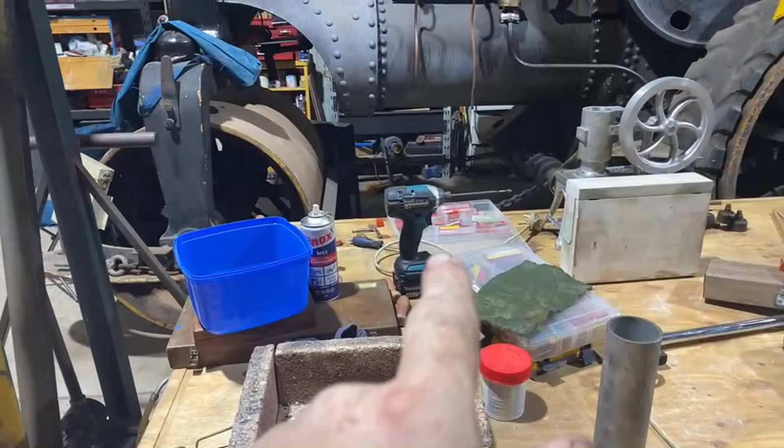Bust my glasses today, not real happy about that, I'm going to have to get some. Hey Dan, that's something that happened today. Found my number 29 drill, which was actually in the battery drill when I went looking. Also found my screwdriver bit, which is in Ken's driver gun that he left here, but that was just then. Christian was here today, Christian's Sparky, he's a member of the club, generally all-round helpful person.

We've got a new switchboard here, and the end, hopefully, of all our electricity problems. That's fixed, and we've got a proper fancy meter in the board, and switches and stuff, so it's a good job.

Anyway, that was something that happened today, and I sort of held ladders and helped pull wires through and didn't do an awful lot more, as I've got vertigo and I'm not real good actually, and I hope it's gone by tomorrow, because right now I feel like I'm going to throw up, but anyway, we'll try not to.

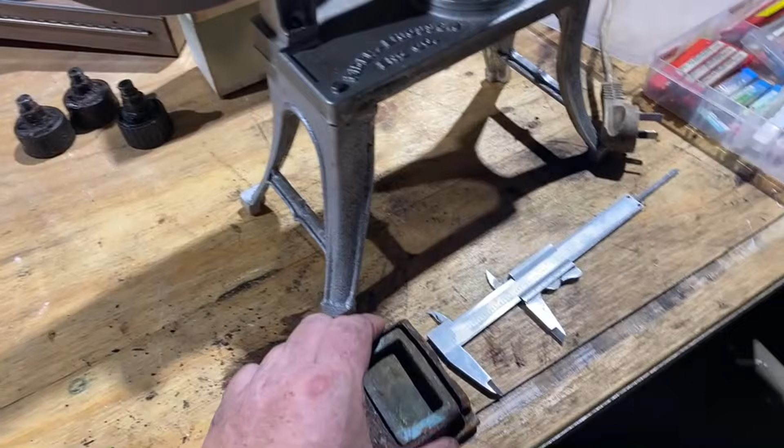Got some photos, I guess everyone who's on Discord or so forth or wherever has probably seen them. Phil sent some photos of the Beyer Peacock engine, now it's been sandblasted. Bit of a mess, to be honest, but it's probably fixable, you can see what's really wrong with it now. It's going to need a new sleeve in it and some ports and things.

If anyone's in Manchester with nothing to do for a couple of days, I'll send you a list of drawings from the Manchester archives and you can look them up. So I've not had much luck.

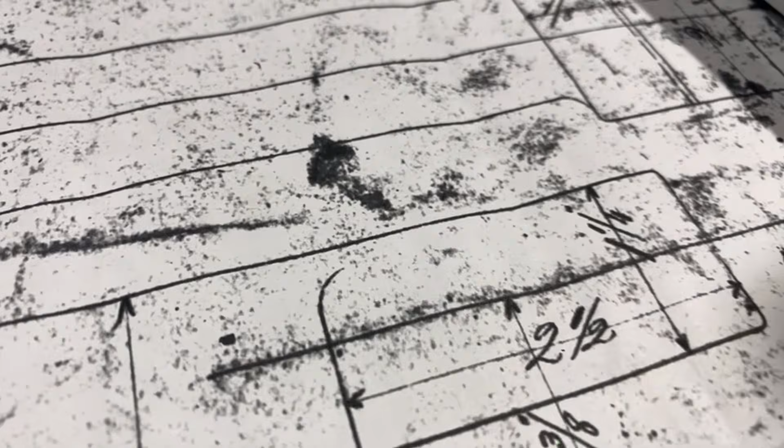I've got these, I haven't got the bits back yet to have a look at, even really have a good look at it apart, because Phil took them for sandblasting. And move that along there, and this, all this other stuff. Phil took them for sandblasting and I haven't caught up with him yet, and the way fuel prices are at the moment, I don't know when that's going to be.

So I've got a couple of drawings, that's about it, that's what reminded me. I've got this drawing of this part.

Which is this bit. Actually 1-to-1, except for the wear, etc.

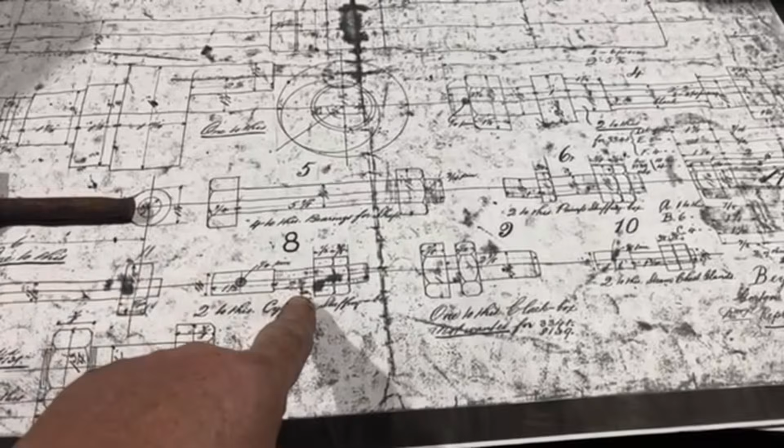So I've got that drawing. Now I've got all the studs. Some of the stuffing box studs have got a pin in them, apparently. They're going to be fun to get off. Steam chest glands, the same, with a pin across them, to hold them in place, pushed in with the pin. I'm guessing that's how you get the studs out and get the gland off, or back far enough to pack them.

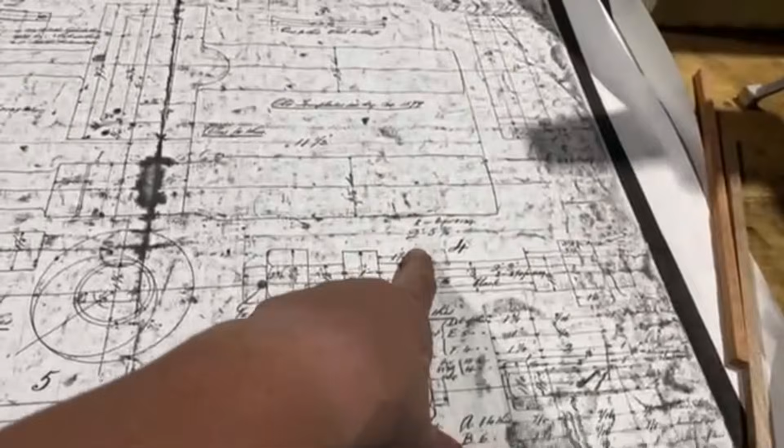The 2 long bolts, which are 2 foot 5 3/4 long. It's this piece here, which is a useful drawing because they're going to need remaking, because this is all I've got left. Let's have a look at them. Basically, looking at them, this is a shortened version, but that's them there.

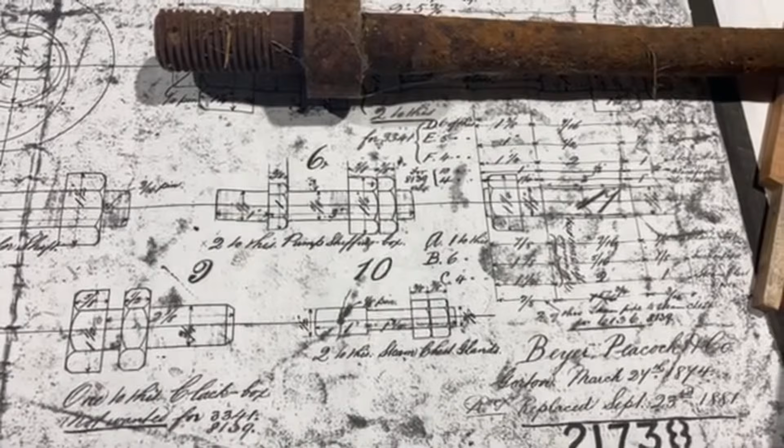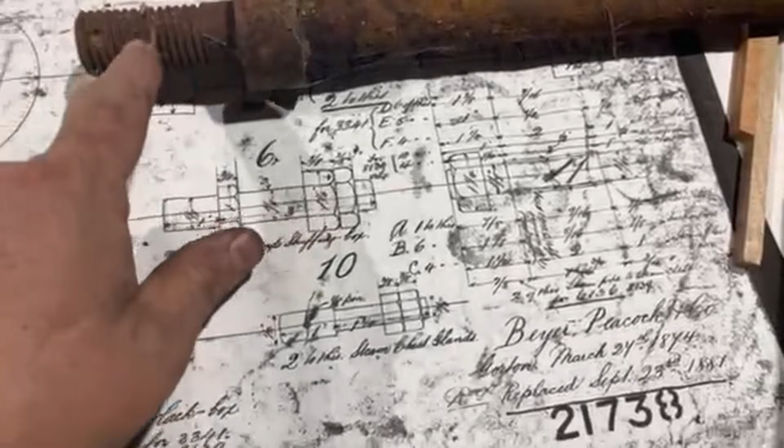So that's that bolt, which is going to need remaking because there's not much of them left, to be honest. There's no thread on. If you look at this end here, it's missing some bits. So that's them. It's definitely the right engine.

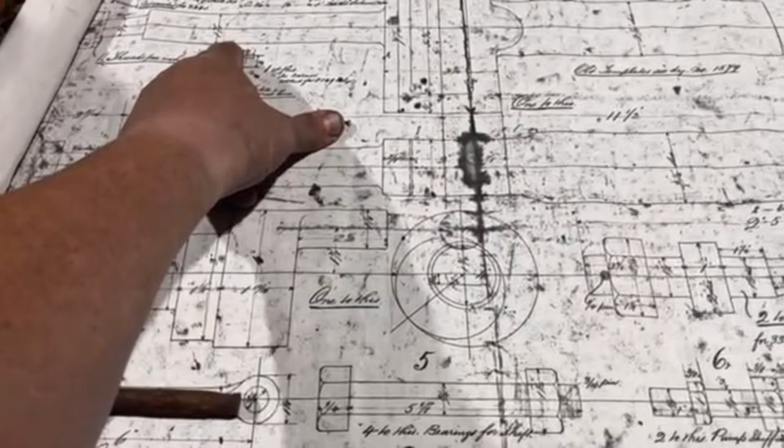What else is on this drawing? Is the Scotch yoke here? Now, this doesn't say it's threaded all the way down, and we'll have to have a look, but I don't think it is. There's a diagram of a pipe carrier. Don't know what that fits. There's these studs with the points on them. A chart for those.

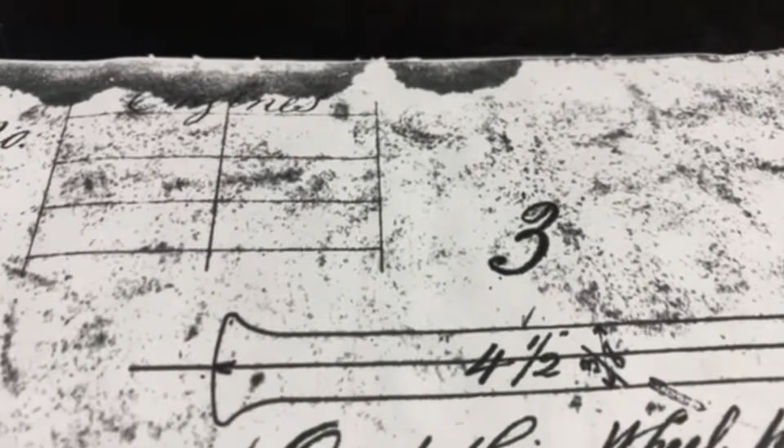Some crack bolts, which I'm not even sure whether we need. There's a pin, this pin here. This is going to be a fun thing.

This pin holds the flywheel on, part number 3. One to this wheel shaft, 4.5 by 5/8 pin. So I've got to get that out. It's going to be more fun than putting a new one in.

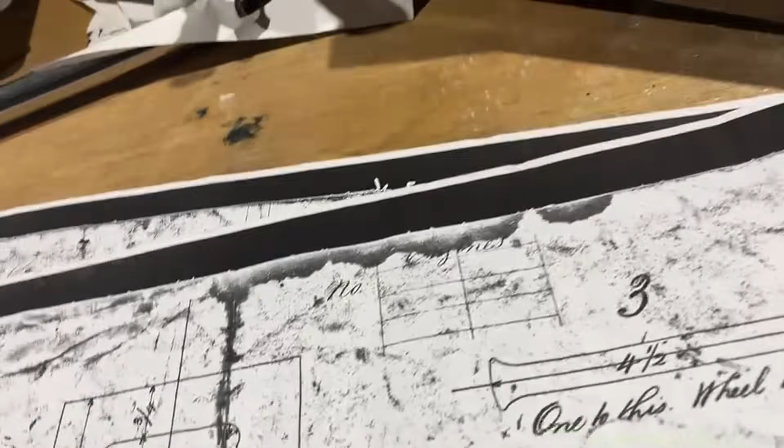And here's the crankshaft, a short version of it, which was on the pump. Mine's a long version, which seems different. I'm not sure, but it's got an eccentric here. The main bearing runs on here and on here, and the flywheel goes on here.

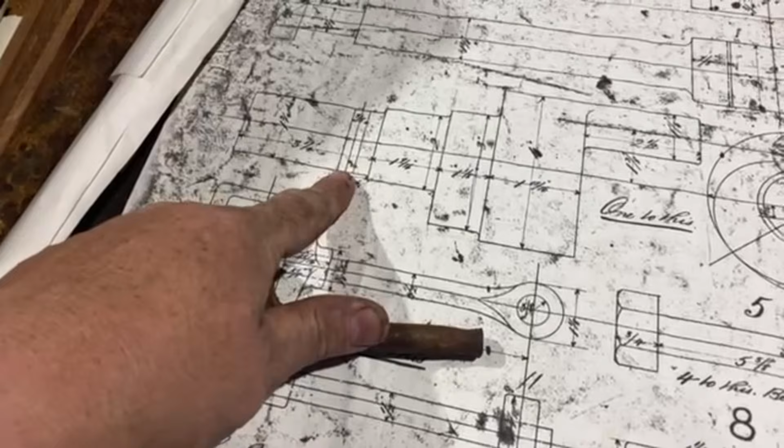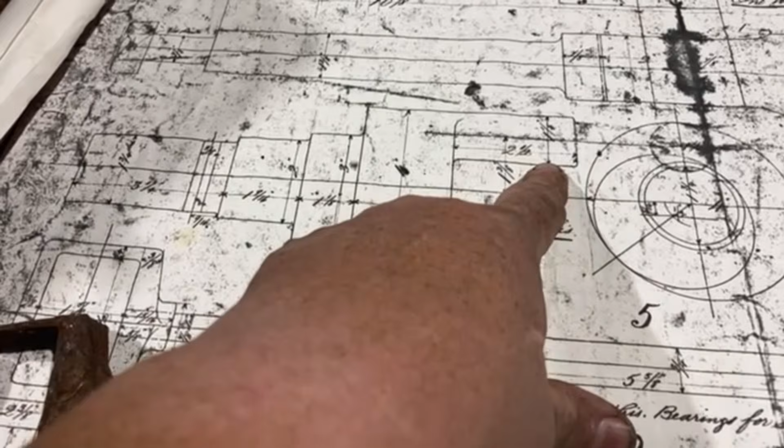And there's a pin on the inside, of course, because that's the most fun place to put it, where that pin goes through that hole in the crankshaft. And it's got a crank machined into here for the 1.25 by 2.5 inch pin to go in the block.

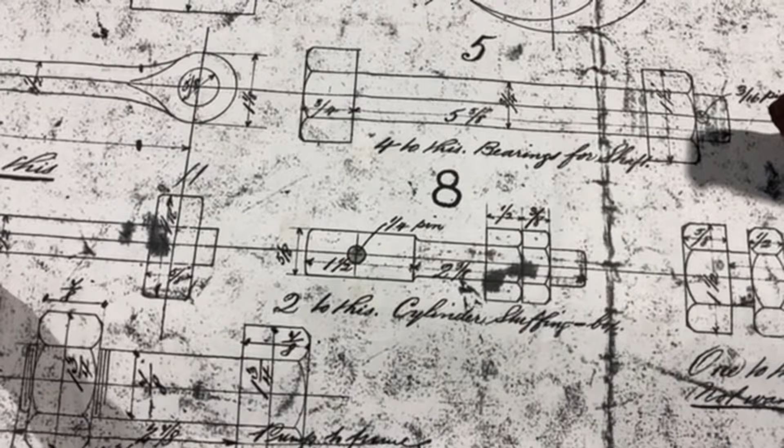So it's a list of parts. Some of them are pretty ordinary. I mean, this isn't real good, to be honest. As you can see, that's part number 8. This one is part number... I don't know, it just says one to this size.

Anyway, that goes on this valve. We'll have a look over here at the rest of it.

Have a look here. The pin is in here, which is a fun place for it. I think, as far as I can see, the pin is in this side of the crankshaft. Now, it's got an eccentric there.

No, I don't know what that is. The eccentric's in this housing, and there's a bearing runs in this side of the housing and in that side of the housing, and then the pin sticks out the side.

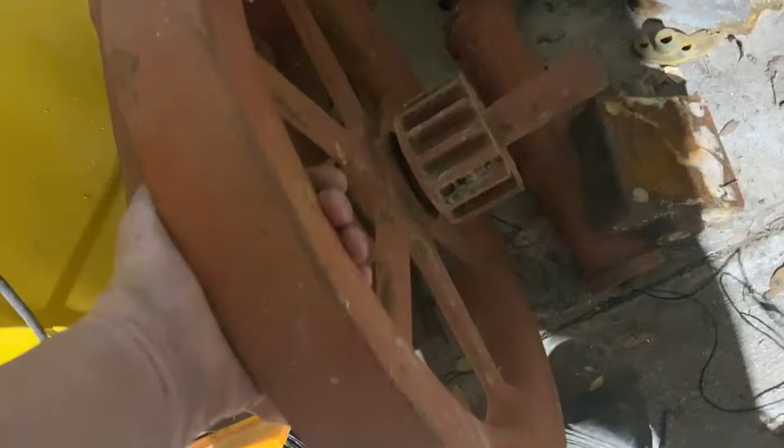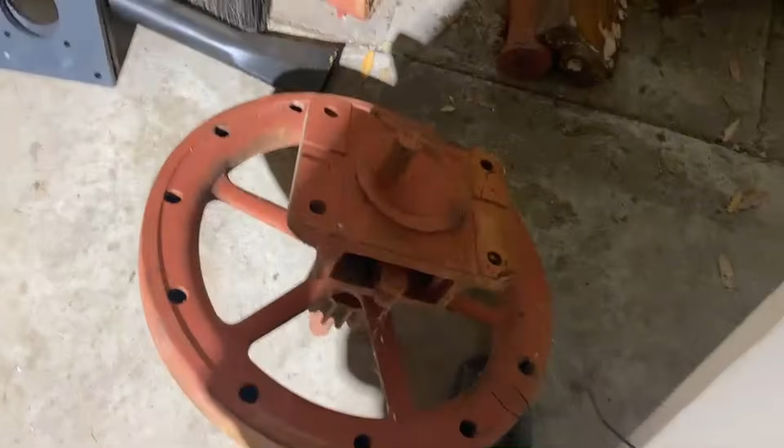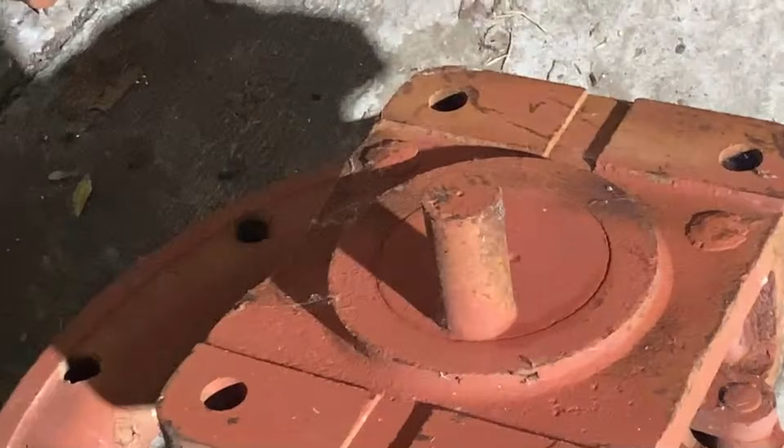If we have a look, get out the light here. So that's the bearing that the crank runs in, and one on the other side. This piece sticking out here is the remainder of that piece on the bench. It's been chopped off. And there's an eccentric inside here.

You notice that this flywheel is balanced. It's got a hollow rim halfway round or 3/4 of the way round. There's no hollow in that side over there.

I don't know, so this one's got a longer crankshaft.

Randy, you're crazy. Don't freeze to death.

So this has got some form of key in it, and then this gear is pressed on, and then that crankshaft sticks out past the flywheel, which it doesn't in the drawing.

So at some point we've got to get some way of getting that and that off so that we can go through this box and fix the eccentric and all that stuff. Don't know what's involved in that.

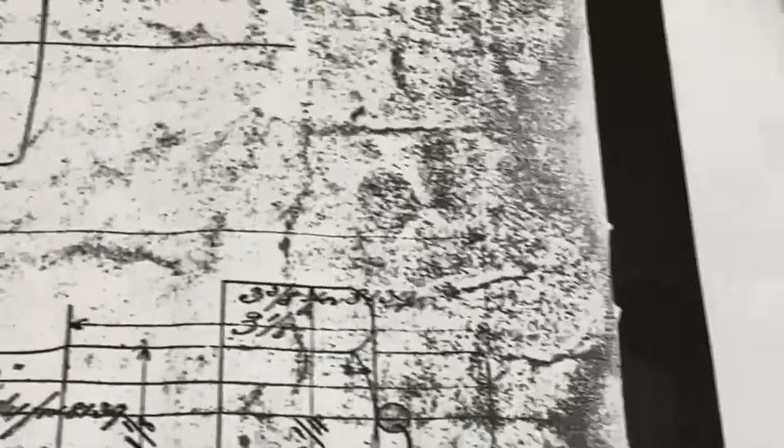Now that's the only real drawing I could find at the Manchester Archives. This is the only drawing I could find. I.C. Lambie copied this. It's a copy of drawing 21738. So it's the original, it's 21738 stenciled on here. But this is probably the date it was copied, I think.

1874, 1881 might be the copy date. This drawing may have been a revision in 1874 because this is a much earlier engine than this.

So we've got that drawing, which is not particularly helpful because all the bits we've already got. And I've got this drawing, which is also not particularly helpful because there's bits that aren't actually on the engine, and it's very muddy.

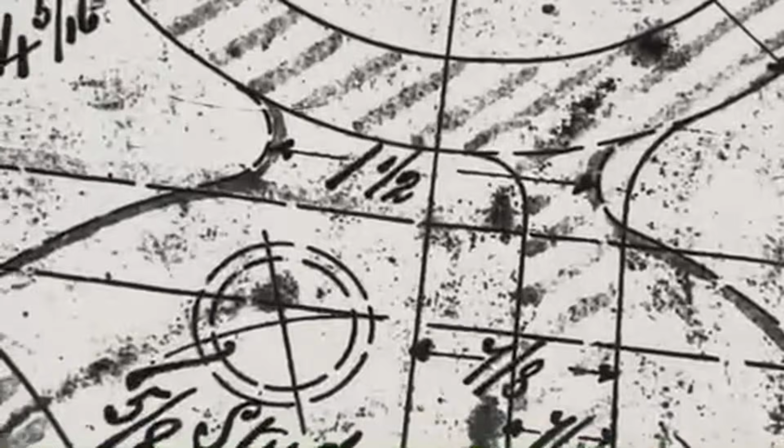Peter's going to get washed out, I reckon. Category 5 cyclone about to hit. Poor guy. Sorry, Peter.

So this is the side view of the pump, should we wish to incorporate it. I believe it to be a footplate mount pump, which is the later one.

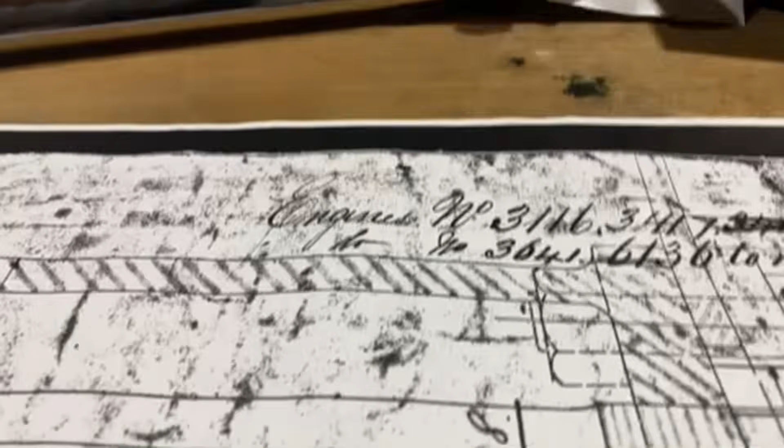This one is for engines 3116 and 3417.

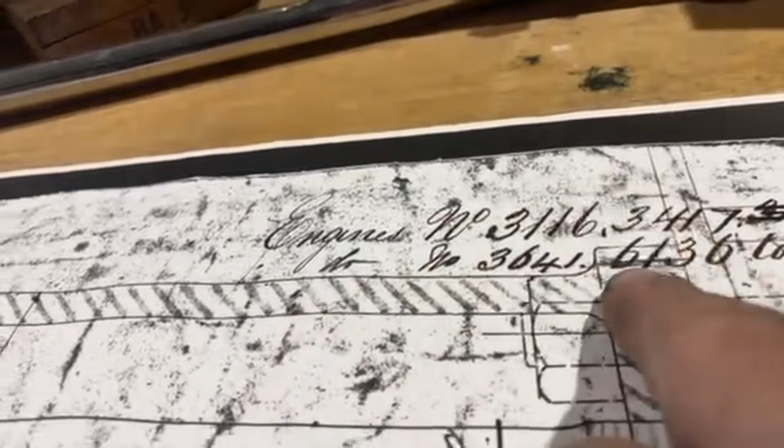3641, 6136. I don't know what those Beyer Peacock engines are. Be very interested to know where the actual numbers are or if there's a record of that. But I don't know whether they're engine numbers, works numbers, or order numbers.

So, on this one, these bolts come all the way through this casting on the bottom and bolt underneath on this plate, which is actually a big square plate. Let's put this on here so you can actually see.

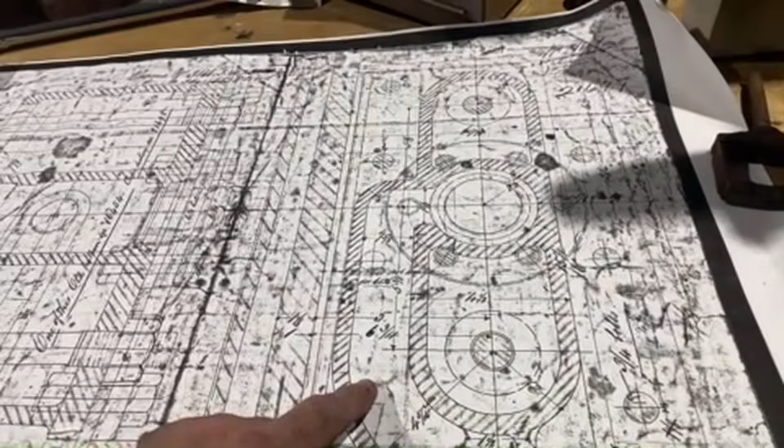This big square plate here, or here, which I don't think is full size. Could be. Could be 5/8 studs. Yeah, it could be full size.

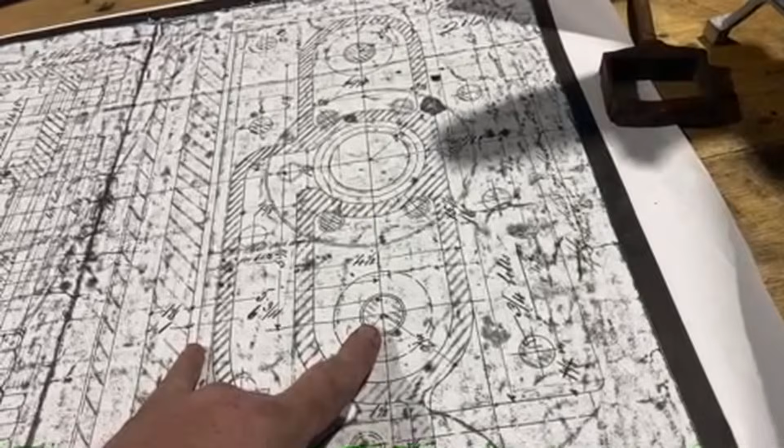6 3/4 across. Yeah, 5 inches there, 6 3/4 across here. So it's a big casting.

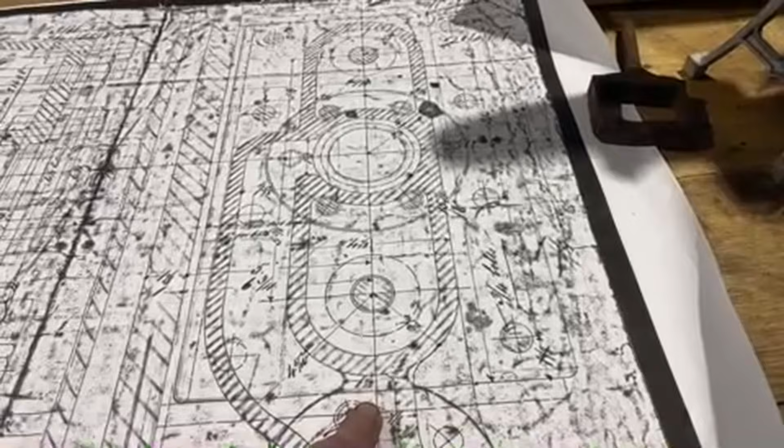It's trying to find some actual dimensions. 16 inches by, the actual casting, 16 inches that way, and 9.5 inches that way. 9.5 across here, and 16 inches this way.

This is drawing number 2169, Beyer Peacock and Co, Gorton, March 1874.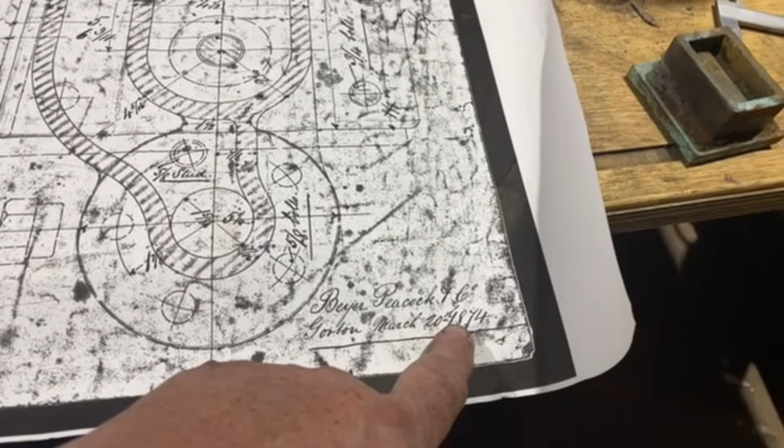This plate is cast off the side of it, this shape, looking at the side of it, and there's a clack valve here. I believe it's delivery.

This pipe runs down the side, or right round here like this, and the second pump. Now this is just a housing for the bolts support. It's a single cylinder pump, and this pump

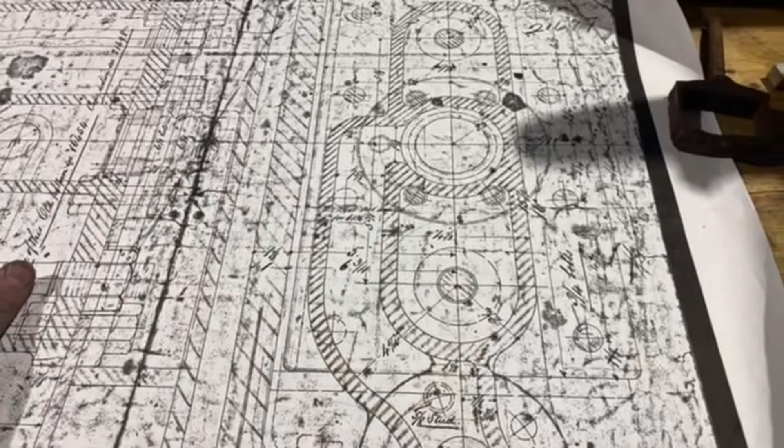bore, which I may or may not have a dimension to, I don't know. I haven't got a clue what bore this pump is. It's got a big gland in the top of it. But anyway, it's irrelevant because this part of the pump is not been produced on this particular engine.

I don't know why. I don't know what the engine was off. I don't know why it was made. I don't know if it was modified. I don't know whether it was made as a foreigner or whether it actually went out to a manufacturer of shearing equipment to be exported. Don't know if things were quiet and they made a few of these up. Haven't got a clue.

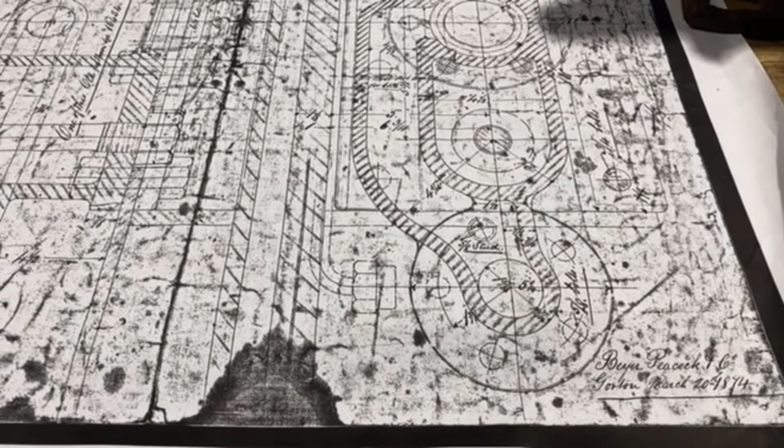Anyway, I've got that drawing. Not particularly helpful either at this point.

Now, it's got all this information here, like C21699. It's great.

Cross section C21698. This is 21697. So there's a sister drawing to this one, which I don't know where it is.

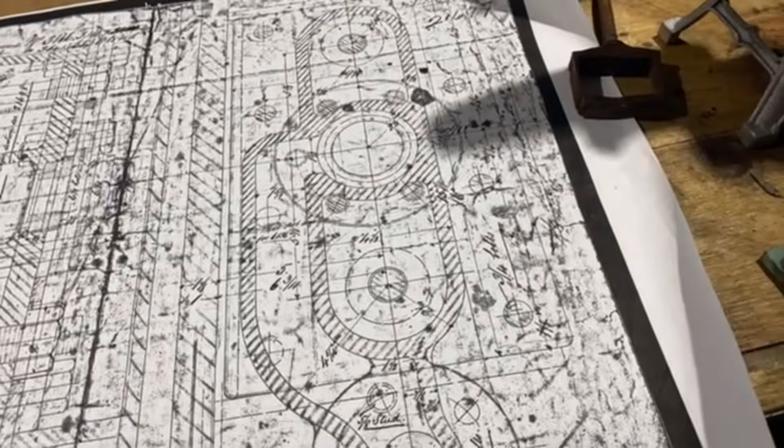And there's notations like that all over everything, all over this one. I'm just trying to find an annotation on here. I don't know if I can see anything here. Old template, see drawing 1579.

Which is a much earlier drawing. And there's engine numbers all over this, so I don't know what they were, but some of them seem like quite late engines. I mean, this is 8139.

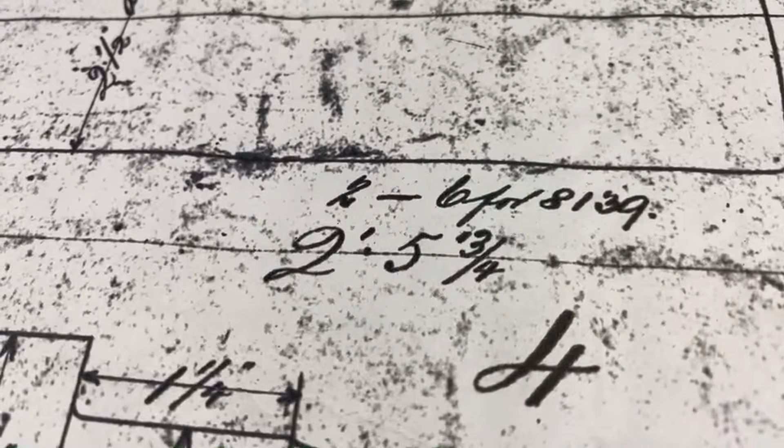Two foot 6 for 8139 and 2 foot 5 3/4 for anything else. Is that why it was, maybe it had thicker foot plates or something, I don't know. But it's only 1/4 of an inch wide, thicker or longer for these bolts.

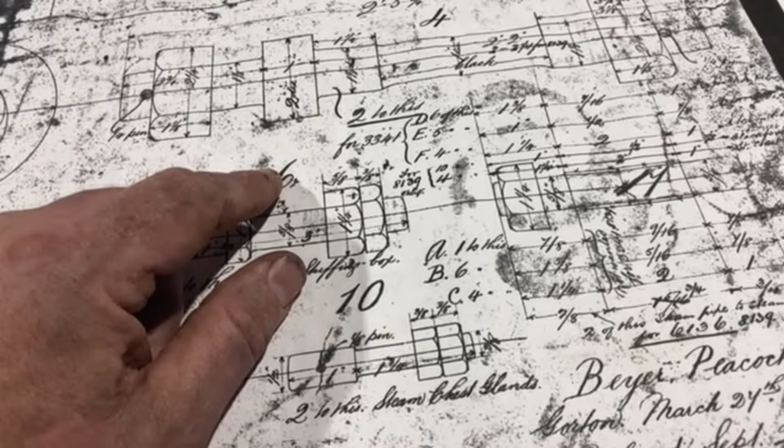Steam pipe to steam chest for 6136 and 8139. No numbers on this engine. Anyway, that's the bit that's still on this eccentric, this half here.

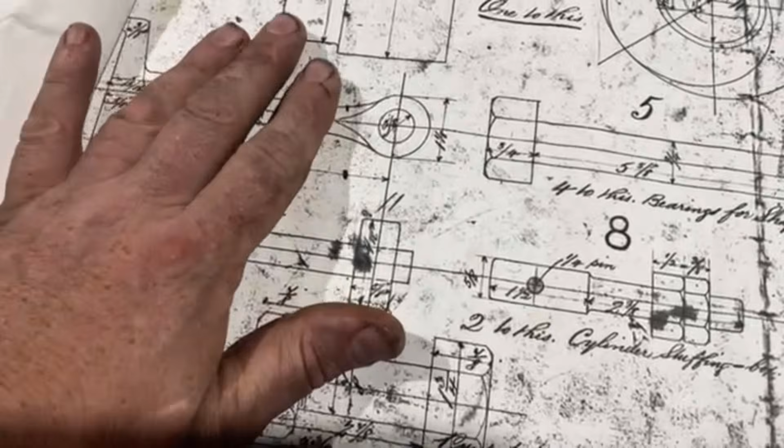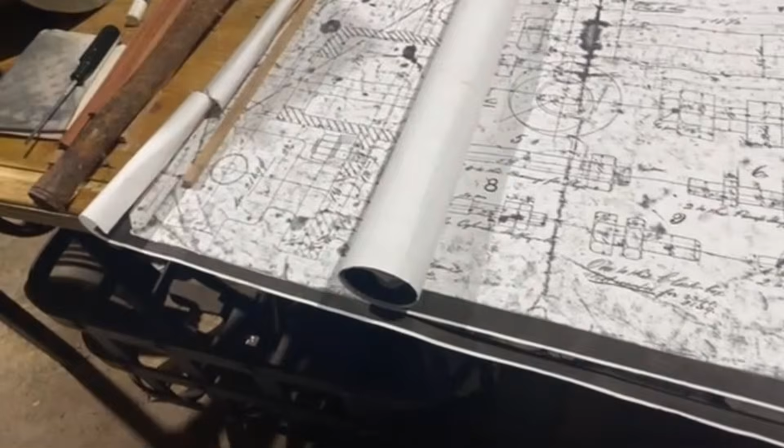Don't know, I've tried to get all these drawing numbers or some more information on this and haven't really had much luck, because the Manchester archives don't have obscure drawings like this digitised.

So it's a matter of going there in person or talking to someone else, or I don't know. I have another lead to follow at the moment on this, and I might sit down and do that later on, some point.

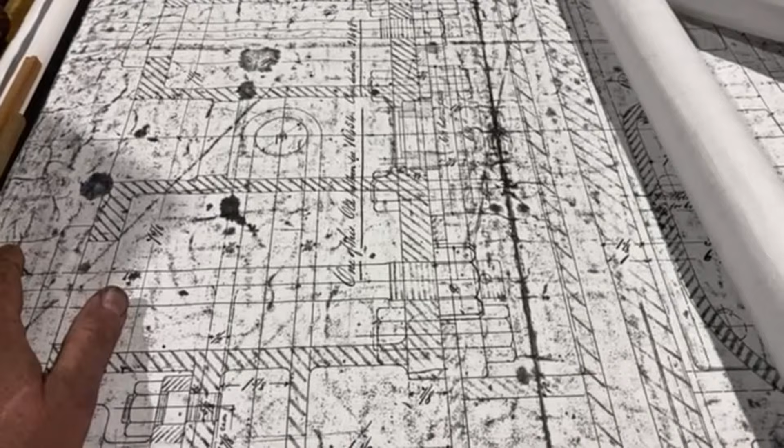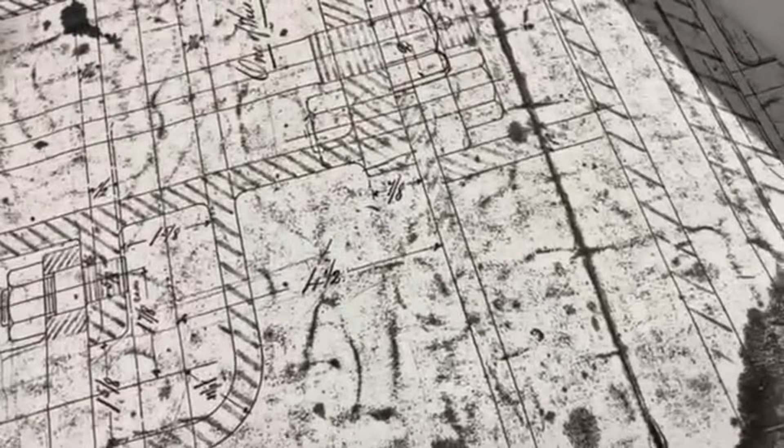One of these old patterns says 16454, which would be the drawing with the correct pump base, I think, for this engine. But I haven't actually seen that one. 16545, that's a much earlier drawing, I think, but it's not as early as this one here, 1579. It's only got 4 numbers in it, so it's a very early drawing. Anyway, don't know how much of it still exists. I haven't got a clue, but it's a bit of a mystery.

That's one of the things that's entertaining us, and I don't know if anyone else is interested, but anyway, we're going to have to chase that up a bit more. There is a museum in Sweden, I believe, that has one of these actually in operation on a locomotive of the correct type. So we're going to see what they've got.

Manchester probably thinks the same as the Fowler Works, the John Fowler Works, I think. John Fowler archives, that information's probably most likely there, but it's indecipherable enough to make a record of them that it's got any accuracy. So no one's bothered, or they've passed over it, or they've made a record of it and they can't look it up, or something like that, I believe is what happens with Fowler records. So my build sheets for my engine are probably there for the roller, but can't find them because there isn't the information, or there isn't the accuracy of the information, or no one's quite sure because they're automatically digitized or something. No one's quite sure what number they are. So without more information, they're a bit hard to find.

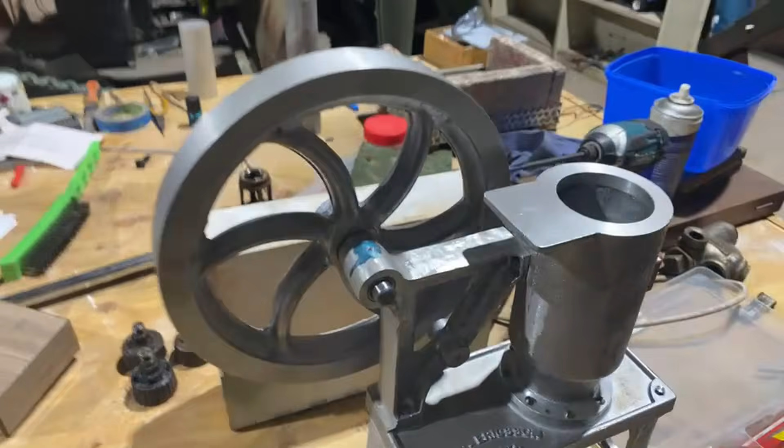You saw the video. I haven't posted, I haven't really made any more videos because all this last weekend I spent helping a friend rebuild a lubricator for a steam traction engine. And that was a 2-day, bit of an epic journey to do that and replace some parts, and they come up really nice. But yeah, that's done.

Anyway, next part on this really is... I don't think we've quite realised 1984 as bad as it's getting. I think it can still get worse, Bill.

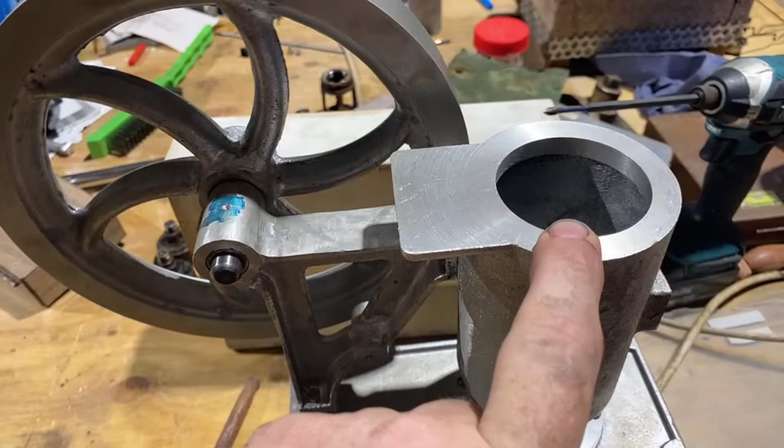Next thing really is the cylinder liner. I've got the bit of stuff for the cylinder liner, and I had a bit of a dig around. I'm going to have a bit more of a dig around because if I can find a short offcut, that'd be better.

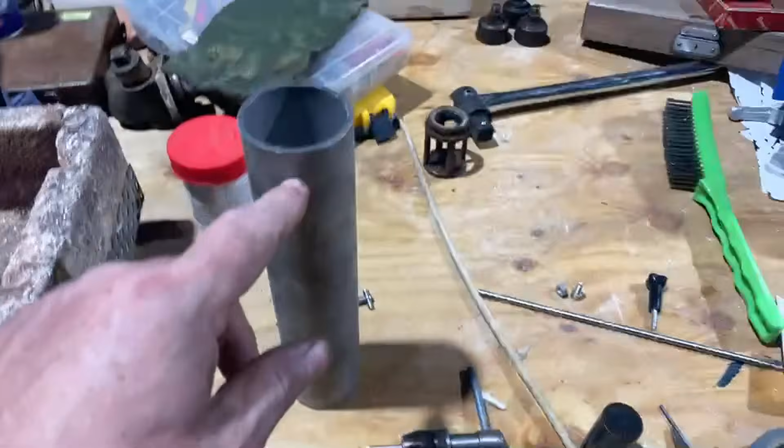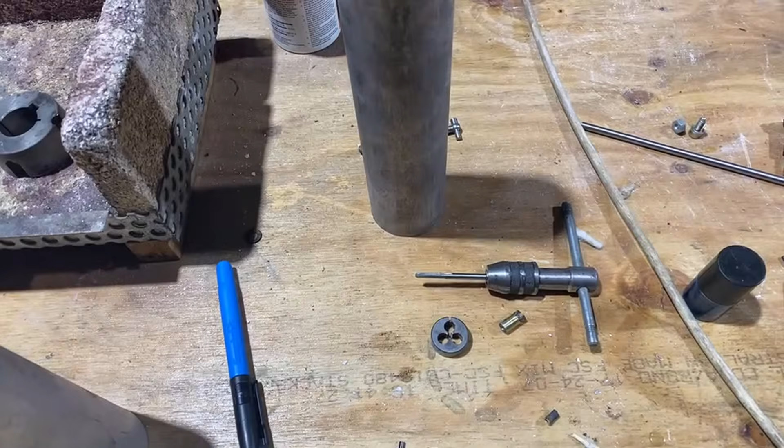Otherwise, I'll go down on Friday and we'll chop this up. Got a bit of aluminium. Need to make a plug for this with a centre in it so that we can set this up with a centre on this end and the four-jaw on this end and machine the outside of it to fit in there. Shouldn't be a big job to do it. It's just we need a short bit of aluminium or something to do it. Might happen at some point.

Got a present. Before we do that, these come in the mail. These are the dowel pins because you can't buy them anywhere locally in Australia.

These are the cross pins for the arm across the top casting. So, having a look. These steel dowel pins, 3/4 by 1/4. Tip them out on the bench. Just a steel dowel pin. They go across here when it's machined down. One this end, one this end. So I had to buy a packet of them. They'll be useful at some point, but just as hard steel pin. One here, one here. They've arrived.

What else? Guys up at the railway bought me this, which is really nice. It's an Aldi job. But he had one and it seems really good. It's got drill brushes, which we can abuse. Be good for cleaning stuff up. Scrub and stuff. And a lot of half-decent Scotch-Brite wheels that I used his and they seem to be pretty good. And a Velcro back. So I want a piece to screw in to put in a drill. These don't work in a grinder. It's the right thread. I don't know why they put that thread in there. But you put them on a grinder and the Velcro just disappears. It just flies off. How do I know this? I know this.

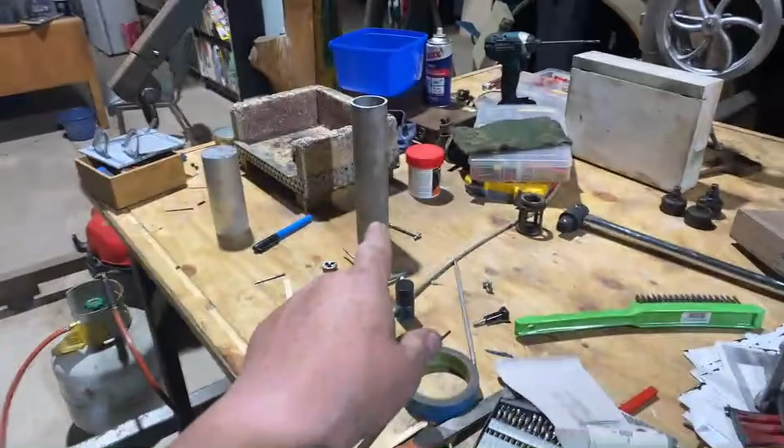What else? There's another project we're doing. This is another thing that's sort of happening. There's actually a chalkboard going in the kitchen, been working on that. And the word on the front of the shed that we're restoring a bit, because it was all starting to flake and come apart. So we've painted this up a bit, rubbed the frame back again. I'm going to put some top coat on that at some point. So there's that.

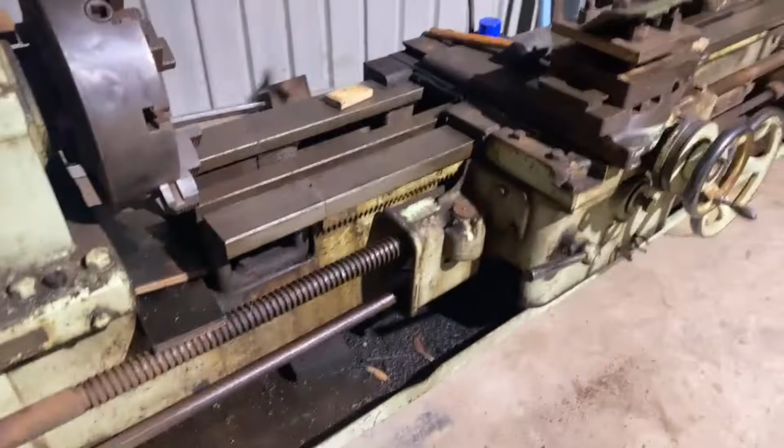William Mackey was here on Monday night. Need to do a bit of a job on some of these handles so they don't give us blisters.

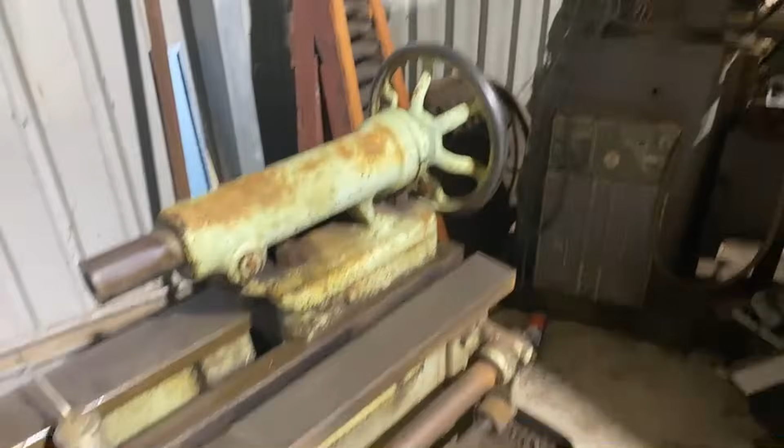Cleaned all them up, which is really good. So that's another job done. He's also done a restoration job on the change wheel cabinet, which needs some termite preventative stuff before it gets filled up with about 200 kilos of change wheels.

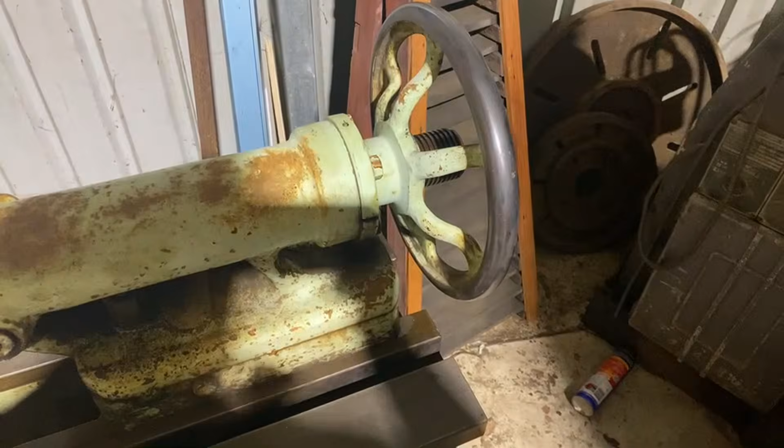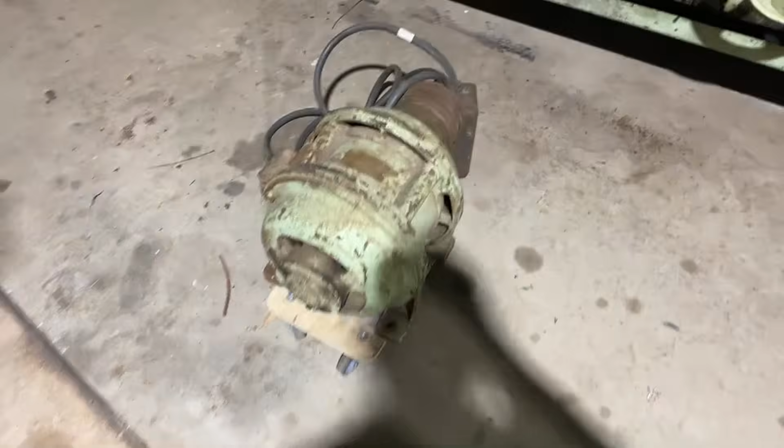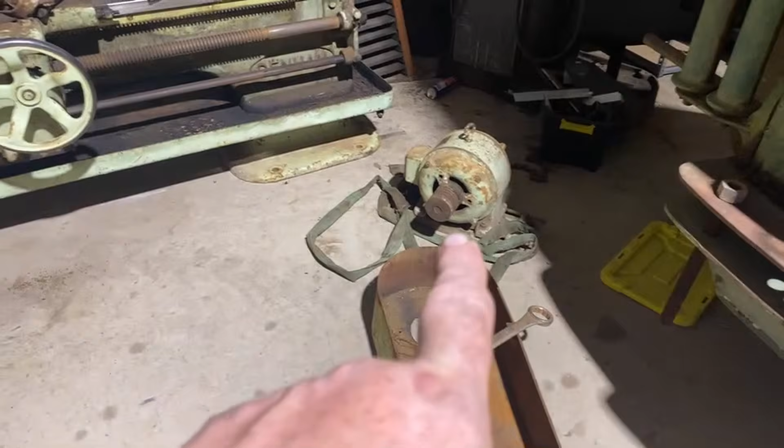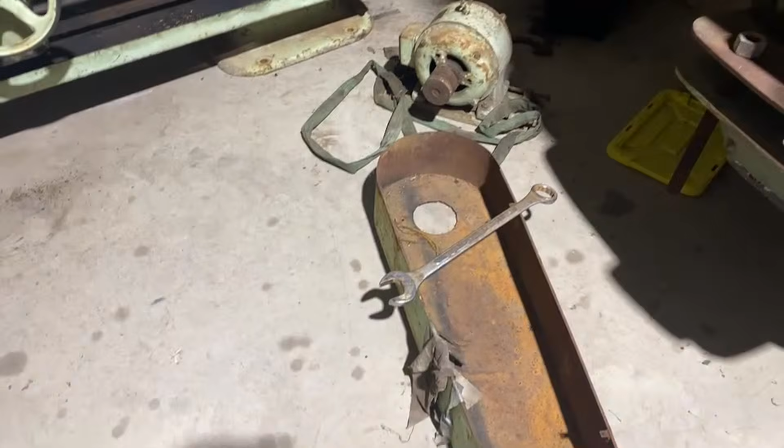There we go. There was another motor arrived, which is kind of not much more use than the one we've got - little, big, little. This one's 3 horsepower, which I think is probably plenty to run this lathe, but it's only got a little pulley. It's 1440 RPM, and it gives us about 450 pulley speed on this, which gives us 375 top speed.

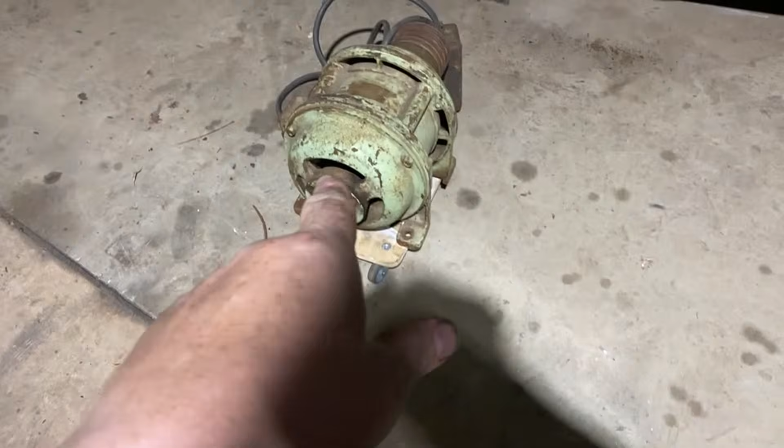Now, this one's got a bigger pulley on it. It's a bigger motor, so the pulleys aren't interchangeable. And it doesn't give us any faster speed because this is a 6-pole motor, so it only does 960 RPM. So it doesn't give us a lot of advantage.

We could put this on it. It's going to use a lot of power. It's going to be a fairly powerful machine with it on there, but we could put this one on it too, and it's a bit more economic to run and certainly strong enough, but I think it needs a 5-inch pulley on it. Big one has more power.

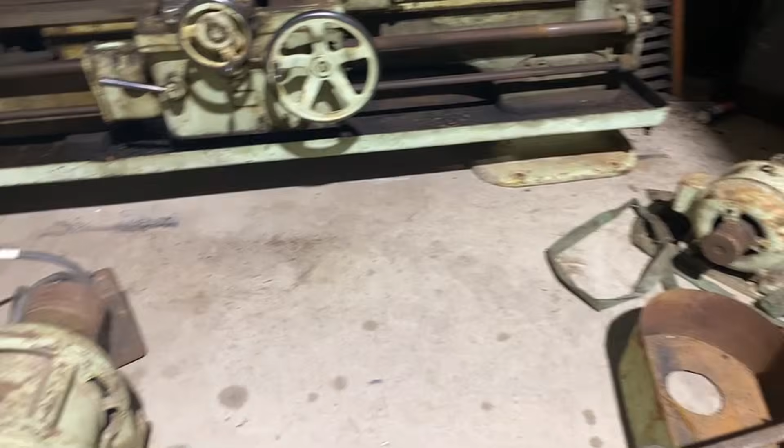I don't think you're going to load this thing down. I honestly don't. If you're taking a 6mm cut off at 60, 70 thou depth of cut off a 12-inch shaft, then probably that little motor's going to feel it a bit. But honestly, power consumption with this is going to be a bit more too. And if you can't do the same job in 3 cuts, there's something wrong.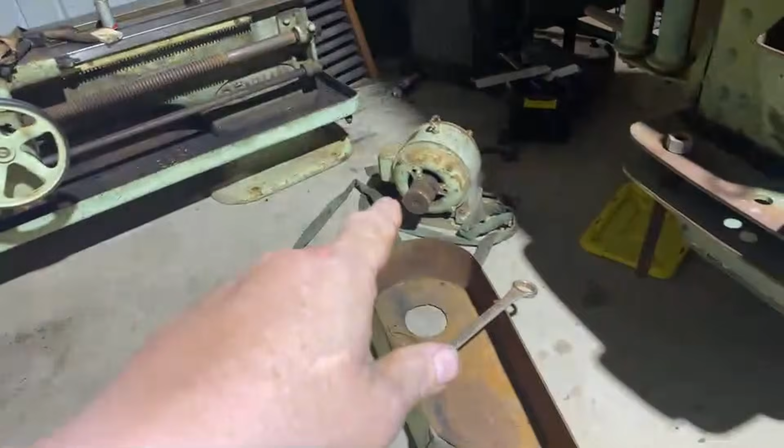I think for our purposes, this one's plenty big enough, and it wants about probably a 5-inch pulley, I think, and it probably could do with a 7 on it. So we'll find a pulley for this, probably just go and buy a taper lock pulley to go on it, a decent one, set it up, and then find some matched belts to go on it. I think it'll run pretty well.

Big motor good, poor power bad? Yeah, probably.

This thing, if you start it up, that meter over there is just going to cook itself without oil in it. It's just going to overspeed. But it might be all right. We'll have a look at it, we'll have a think about it. But I think this motor's going on it. Big slow motor's all right, but it's going to take forever to ramp up and slow down, and it's going to be noisy. And if we bolt it on the wall, it's going to vibrate like crap. I don't know, we'll see.

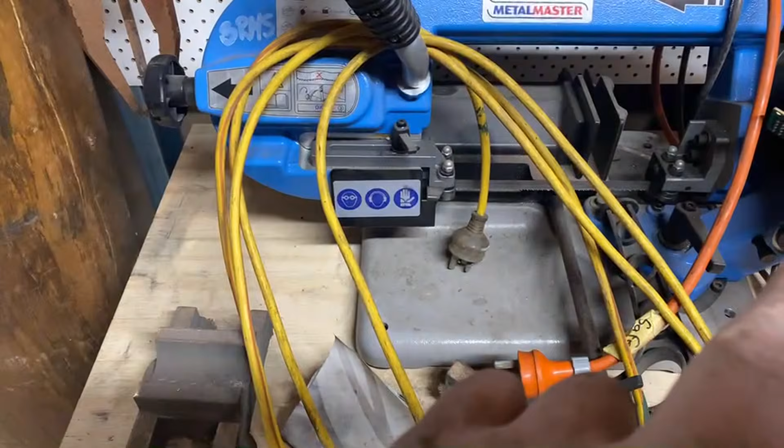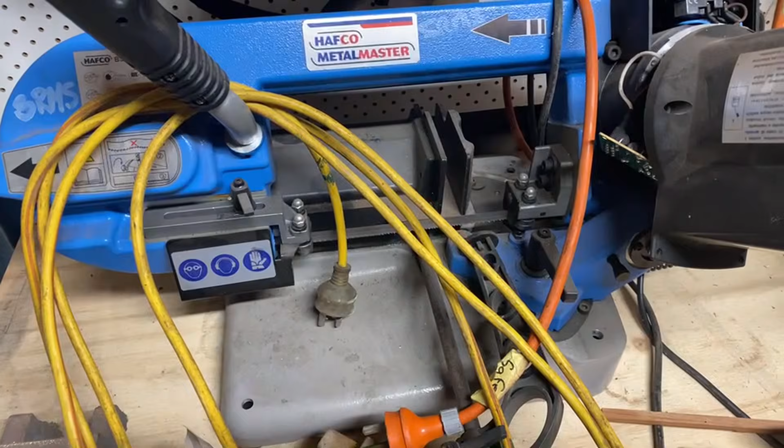This needs a new circuit board, I believe. I was going to get Christian to have a look at it today, but we ran out of time. I don't think it's a motor, I think it's a circuit board. I'm going to have to buy down and get a circuit board for this from Hafco when they have one back in stock. It's a bit of a problem. Anyway, we'll get there, we'll get there.

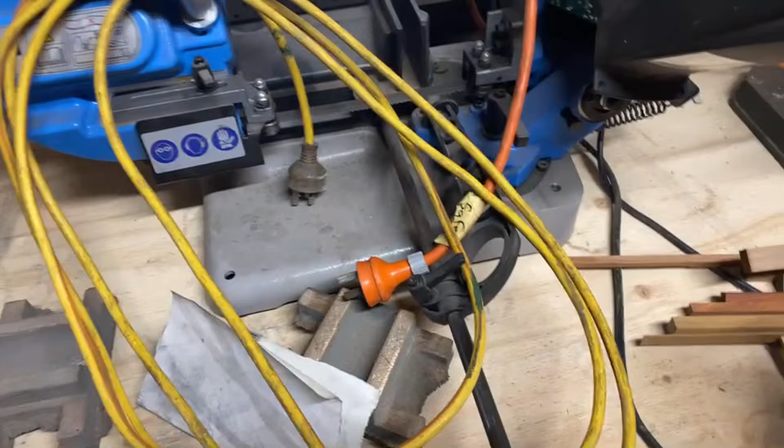Projects on this, slowly. I'm going to end up, leave that there. We're going to end up with the curve in this we don't really want. I'll put that up there.

But the parquetry floor for this half of the workshop is underway at work, it's looking really good. So we can start thinking about putting some bits in place then, get some stuff done. I've really got to pull these walls out and repaint them properly.

That's a job as well. I'll put some undercoat on the back one anyway. So I might get there when I'm feeling a bit better. That's another thing.

Don't know, there's a lot of stuff to put away. I had this sheet of plywood here that I was going to sacrifice for the electrical board, but I end up going down to work and finding another bit that's a bit bigger. So that'll do the job nicely. We've screwed that on, it covers from there to there.

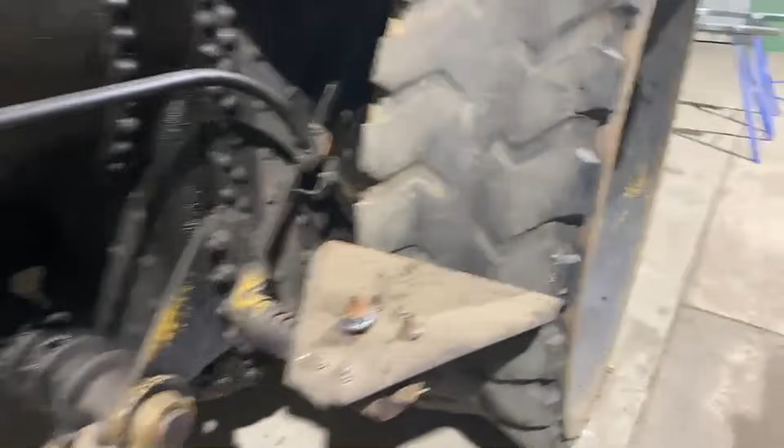I've got 2 banners I'm supposed to be painting for Shannondale Steam Shed. It's a work in progress. They've got to be done, I guess, by about June or a bit before. There's a bigger one and the smaller one. They've got to have the logo on them and Shannondale Steam Shed, so that's another job. They need to be stretched out somewhere on the wall at some point.

Got this abomination here, I'm going to probably send Dan at some point. Yeah Dan, yeah, we'll get to that in a minute. Thanks for that.

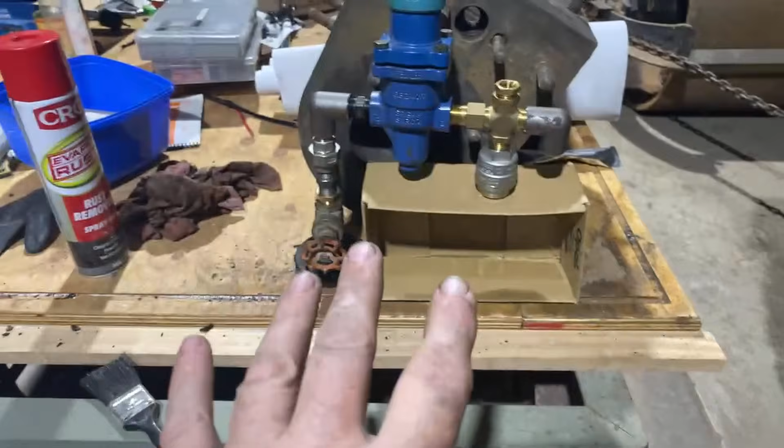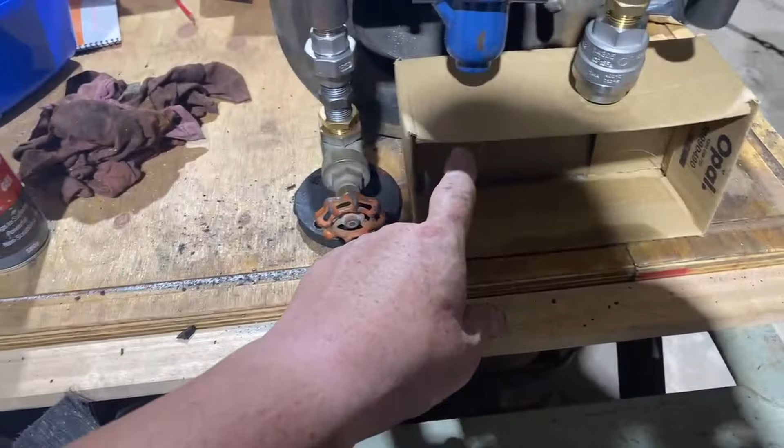This abomination here with all these fittings, probably not going to put on the roller as is. I don't want to be that person, Dan, but if we got one of these with a male thread on this end and a male thread on this end, we could get rid of all this here and here, couldn't we? And if we got a tap, yeah, we could probably get rid of about 6 or 7 fittings here, which would be kind of good. And we could let this back down. It could quite easily come down about another 4 inches without any problems, and so forth and so on.

In black steel, absolutely. But that's right, I was going to ask you, where is the best place to get them? And we'll send for them or whatever, or get them posted or something. Because that's what I'd like to see. I'll sort it out. So getting them locally is a bit difficult, you can't get them. Isn't there somewhere in Brisbane or Sydney or somewhere that have them? Got a bit of a list. Give them a call and get them to post them up to us. We'll see what we can find.

I'm going to say more than 15 millimetres. There's 3 fittings here - 1, 2. I mean, this one's probably important.

Probably a tap with male to screw in here, and this to screw on the tap, and then a male elbow to screw in here and screw in here. Saves a lot of thread tape, nothing else. But anyway, we'll have a talk about it, and if there's someone in Brisbane I can get them from, we'll have a go.

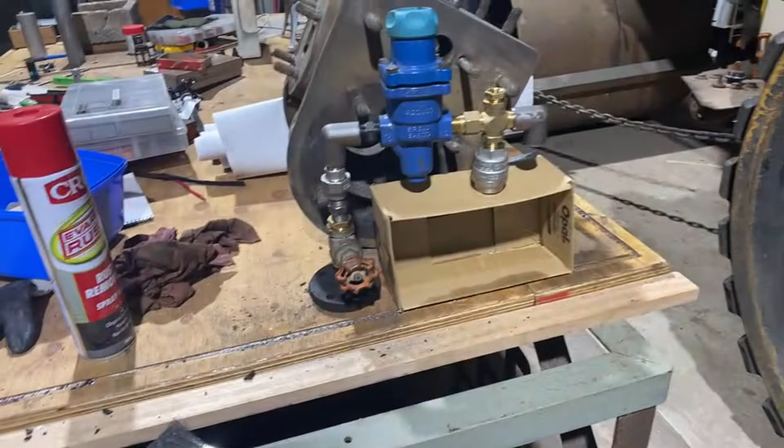Model engineering, model and craft and art exhibition here in Glenray on June the 30th, 29th, 30th, 31st, something like that - last weekend in June, 3 days. Mark Osborne, looking at you - be very, very keen to get your tethered cars up here and all the guys. Be very cool, so bear it in mind. Last week in June.

Shannondale Steam Shed has been offered a couple of tables for static displays inside. I don't feel like I probably want to run steam. I think it's just going to be go and talk to people and not have to stress about other stuff, sort of a day. But for this time anyway, we could put a static display, and maybe next year if it's still a thing, or if it works out, then we could have trains running and all sorts of things.

But at this point, I think it's going to be a static display, but it's going to be fun. And we've all got lots of engines, lots of cool stuff to bring. We'll see how it goes. I haven't got anything actually running - that's why I'm saying that.

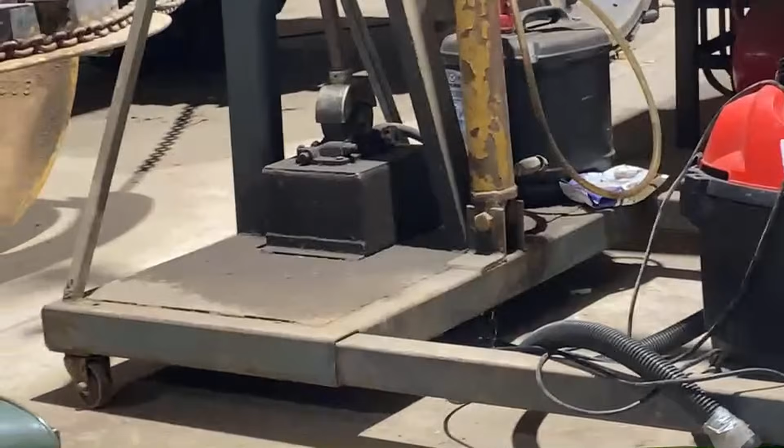I'll ring my mate at the gas fitters in Brisbane sometime and see what they've got.

Anyway, there's an art exhibition at Glenray at the School of Arts, which should be quite good. It's called Steam and Cedar. I don't think there's anything really up and running or any real advertising until the first of April. So from then on, it'll be full out. There is some art competitions, or there's an art exhibition with prizes.

Are you there, Peter? Peter's back.

There is an art exhibition with prizes. The theme is puppets, I believe, which sort of suits our thing. So I've got a little automaton that I might just quickly knock up at some point if I get a chance. I don't think I'll have - I'd very much like to have the donation box finished, but on my own, that's a bit of a job. And even coordinating other people, that's a bit of a job. But we'll see how we go.

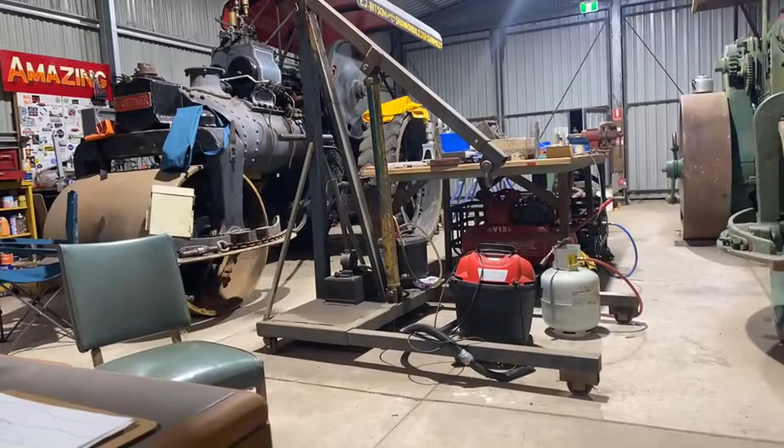We've got electricity sorted, so the next thing I'm on to is water, and see if we can push that a bit, see if we can get some extra water connected.

2 weeks, 3 weeks, 2 weeks. I think it's only 2 weeks. Maybe it's only 2 weeks. Time gets away. Boiler inspector's due in about a month, something like that.

So that could be good. But it'll be 3 weeks before you turn up. Yeah. You've got work in the middle of it all. So anyway, it doesn't matter, whenever you get here it's good. But appreciate you turning up sometime. You might see me midweek. Oh yeah, right, that works. We did say that, we did talk about that earlier.

Anyway, that's what's happening here. That's pretty much an overview of the shed. Paul and I will get in and do some stuff this week and actually have this place a bit more presentable.

And I will try, probably tomorrow night, to get in and have a bit of a go at the hot air engine and whatever else it needs. Tomorrow and Friday might be nights for that. I don't know, still got to do some painting. There's lots of jobs to do, lots of jobs to do.